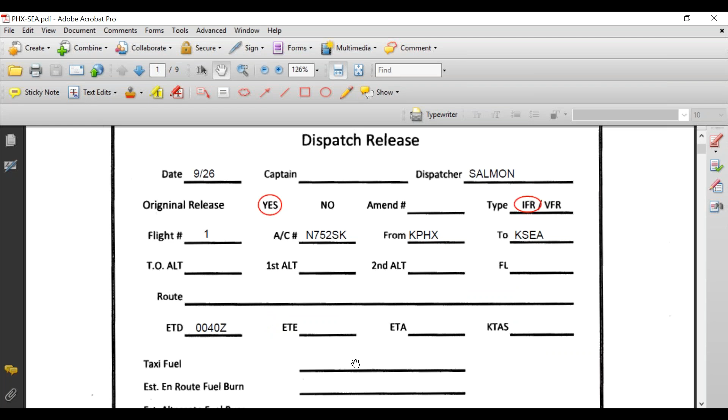Okay, so this is the Phoenix Seattle flight plan that we started. We started filling out some of this information, so let's just go figure out where we're at here. Okay, so we've got the route all in there. We did that initial fuel. So yeah, all this stuff is still blank.

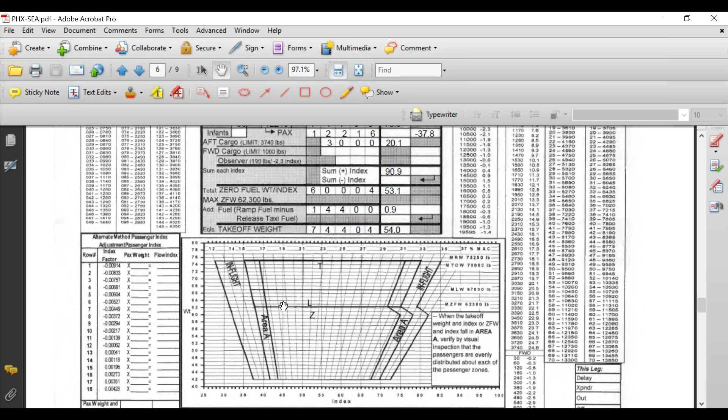We picked all of our runways for takeoff, landing, the instrument approaches, filled in all of the minimums and everything already. We did the weight and balance. Everything looked good there. We've got it all plotted on here. So, okay, so we should be good.

So we estimated on this flight, our initial fuel estimate came up as 14,400 pounds of fuel. That was via using that 4,000 pounds first hour, 3,000 pounds second hour estimation that you guys have been doing all week. Okay, so now we're going to introduce the next little part of this, which is called the simplified fuel estimate. So let me bring up the charts for that real quick.

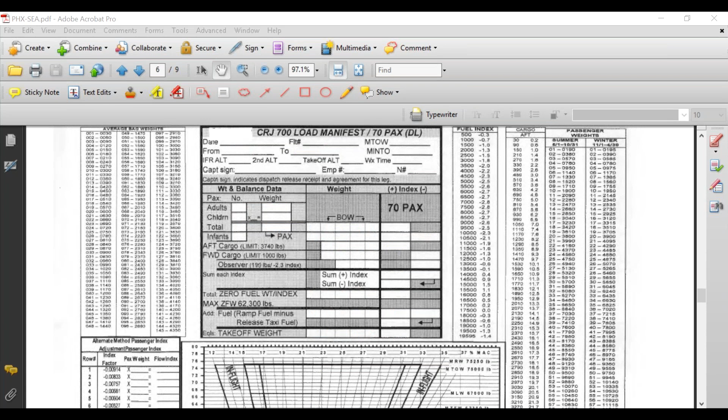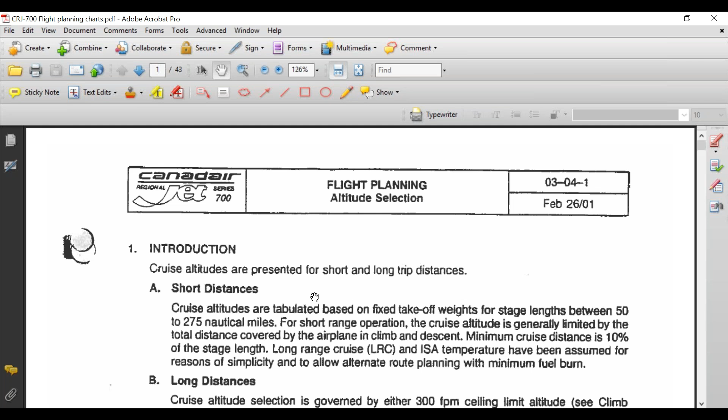So now we're going to start taking a look at some of the different charts we use for the CRJ 700 flight planning. I'm going to drag these over into here. Okay, so this is a little packet of the primary charts that we end up using. I'm going to walk you through kind of how we start using some of these things. So obviously you're going to have to reference back to this video. And obviously this is all recording here.

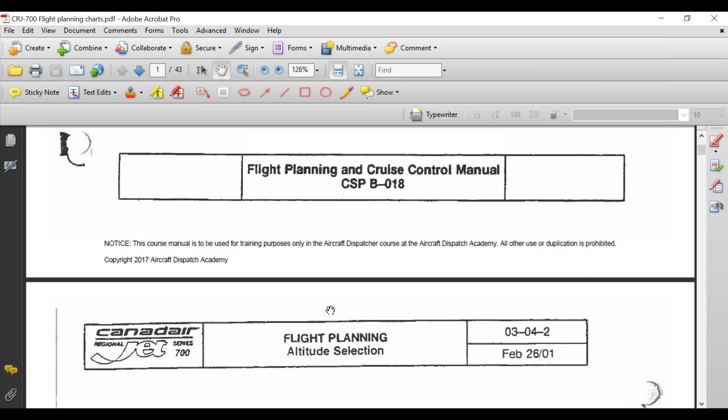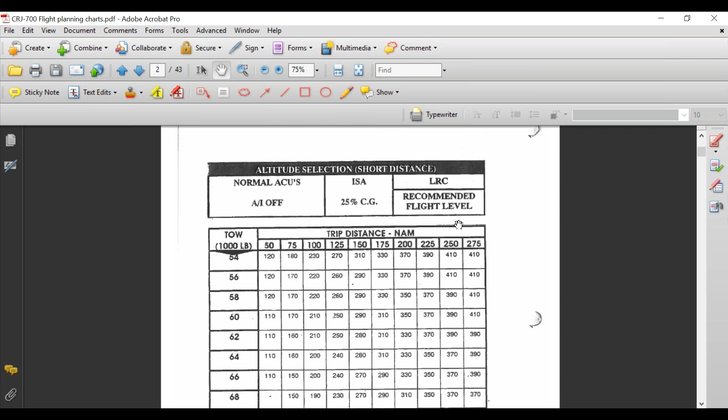So we're looking first for what's called the simplified flight planning charts, okay? And they're just a few pages in from the beginning here. The first couple of pages are all altitude selection charts on how we select our altitude. Actually, let me go back because we do need to figure out our altitude at the very beginning here. Okay, so we'll just actually start with the beginning. So that's altitude selection, short distance, altitude selection.

Okay, as you would think, obviously in the real world we don't use such a ridiculous estimation in real world aviation. So basically there's 3 different ways that we estimate our fuel. The first one we've already done, that's the initial fuel estimation. And the only reason we even do that one is just to get us a rough idea of what our fuel will be. And if anything, it's kind of an overestimation, okay?

So if anything, it's going to put us a little on the heavier side, more fuel than we actually really need. And then we do this next one, which is called the simplified fuel. That's going to refine it down a little bit better for us and give us a little bit more of an accurate depiction. This one is going to take into account the temperatures that we're going to be taking off in, landing in, and flying through, and then also the winds along our entire route. Okay?

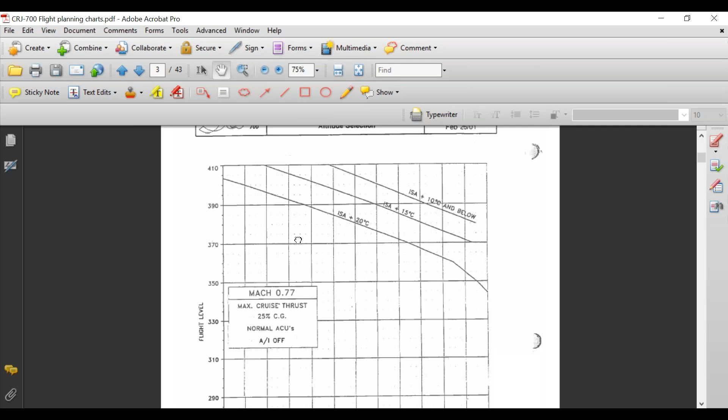So the first thing we need to do, we're going to talk about this little thing here. As you can see these little lines up here, you see this term in here. It says ISA plus 20 degrees, ISA plus 15 degrees, ISA plus 10 degrees. So has anyone ever heard the term ISA yet? In here, right?

So if you go all the way back to like quiz 1, 2, somewhere in there, we talked about ISA. However, I don't necessarily expect you to recall it because it was weeks ago now and there's been a plethora of information since then. But you're going to start seeing, and you probably already have seen, we're going to start taking stuff that we've learned and bringing it back in and putting it into practical use, showing you why we learned it and where we're applying it.

So ISA is the International Standard Atmosphere. What it means is it basically says to us that at sea level, the temperature should be 15 degrees Celsius. This is more of an overall general idea. I don't know how they came up with this temperature, but it's what we use ultimately to figure out how we do performance and what charts we look at. Everything in aviation, temperature-wise, is based on ISA, okay?

So what we do with this ISA figure is we take wherever we are at and we have to compare it against ISA. That's what we ultimately do. So I'm going to pull the weather packet back up that we are using for the Phoenix Seattle flight that we're doing here. Where to put it. In here, and just grab it because we wrote down the information in here.

Okay, so we're going to take a look at Phoenix first. We wrote down the weather that we can expect at departure in Phoenix right here, right? So this is our temperature. This is basically the current weather in Phoenix. It shows that it is 31 degrees Celsius, okay?

So ultimately we are taking this temperature, this is our origin, and what I like to do during this part is break down the route, because we start gathering different temperatures in this phase to come up with some averages for our flight so that we can use it on our charts. So the first thing we look at is Phoenix, and we see that it is 31 degrees Celsius.

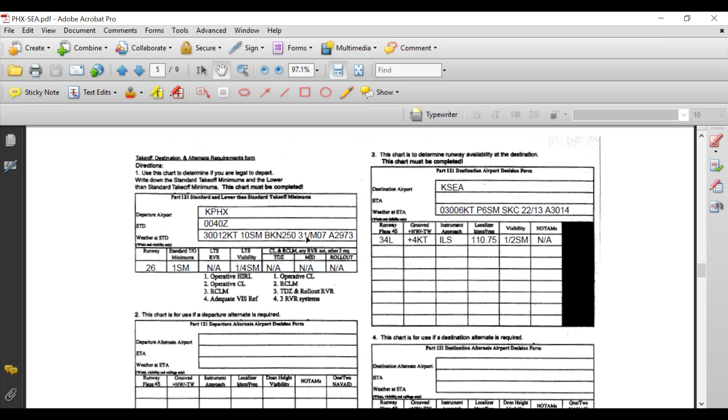We know that ISA is 15 degrees Celsius at sea level, and now we're looking at what we are. We're starting this flight in Phoenix on the ground, and on the ground in Phoenix, we are sitting at 31 degrees Celsius at 1,134 feet above sea level. So now we have to figure out the difference between our real world condition and what ISA assumes that we always are supposed to be, right?

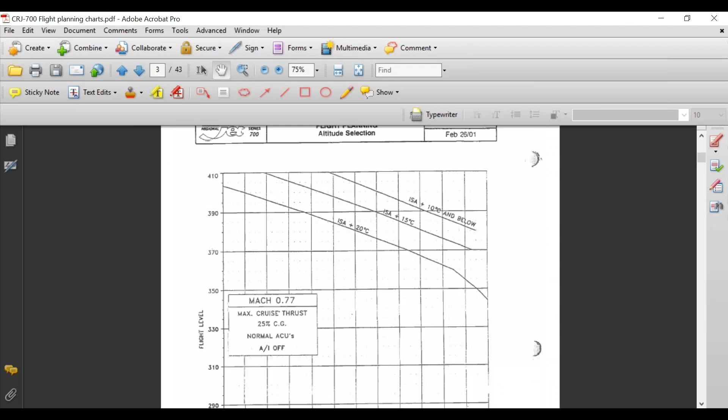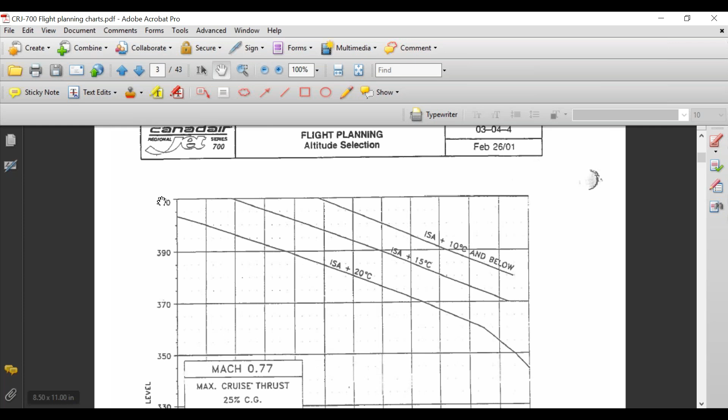I'm going to come back over here. So this chart we're looking at, they look confusing at the beginning, but ultimately the charts are pretty easy to use. Let's zoom back in on this one. So you can see these little lines right here: ISA plus 20, ISA plus 15, ISA plus 10 degrees Celsius and below. These numbers on the left are our altitude. Flight level 410, so 41,000 feet, 39,000, 37,000.

So what this chart is helping us figure out is what our aircraft is going to be capable of climbing to. There are 2 things that we need to know for this chart. We need to know our takeoff weight, which we already know, since we've done our weight and balance. And then we need to know what our origin temperature is.

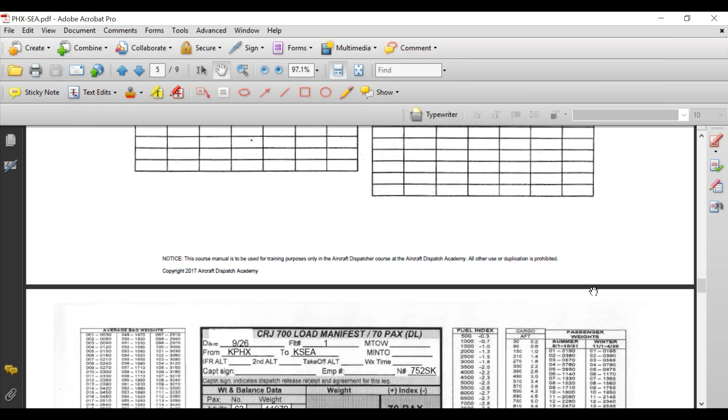Okay, so let's cruise back over here really quick and go back to our weight and balance. Our takeoff weight: 74,404 pounds.

And then we already know that ISA number. We're at ISA plus 20. This is going to tell us how high this plane is going to be able to climb up to. So we're figuring out what our cruising altitude is going to be for this flight.

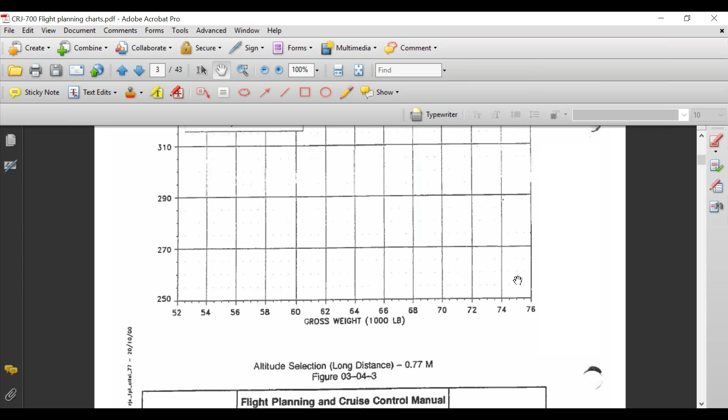So we're clear up here, 74,400. That's basically 74,500. We're going to round it up to the nearest 100, but going up always. So we're going to be right over there. I'm going to put in a line.

And then we're also on this ISA plus 20 line. So we have to draw a line here that meets up from here, wherever it meets into this line, and that's going to be our altitude capability for this flight, the max we'll be able to climb. When it's hot, it's always harder to reach the higher altitudes.

So I'm going to draw a line from basically the middle here, just go straight up. Just wherever it meets this line, basically right there, that's going to tell us. Lucky for us, it hits it basically right at 35,000 feet.

So the next consideration for this, we know that we cannot climb any higher than 35,000 feet for this flight. The next consideration for us is, what direction are we flying? We're going Phoenix to Seattle, but overall, when I say direction, what I ultimately mean here is we're looking at which flight level we're going to file, as far as, if you're going east, we do odd levels. If you're going west, we do even levels.

So you have to base this off of, even though most of this flight is like northwest, technically that's going to be your real direction. But if your origin, in a situation where you're going straight, and I'm doing it the way I'm looking, but if you're going this direction, Phoenix to Seattle, northwest, if your destination, you just need to figure out, is my destination west or east of where I took off from? It's wherever you end up. That's kind of how you base what you're going to file, as far as, okay, this flight overall is a western heading flight or an eastern heading flight.

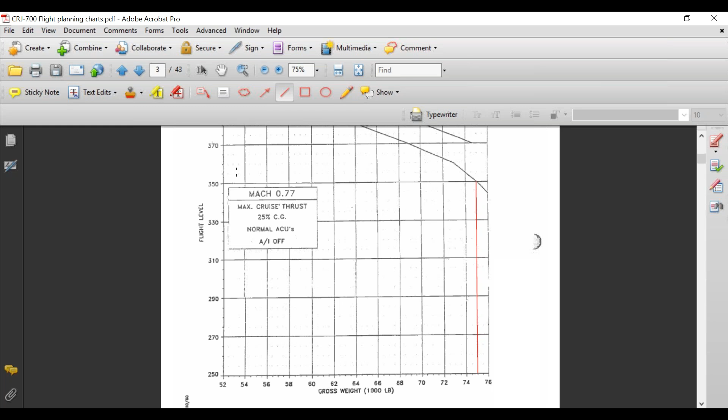It's called NEODD SWEVEN. Has anyone ever heard that? It technically means north and east is odd, and south and west is even. So anyway, NEODD SWEVEN, in case you want to remember that. But really, the best way is just to say, well, is my destination west or east? Because you might be on a flight plan that circles over here, and then if you go around weather, then you're going east for a while. But wherever you end up landing, is it east or west of where you took off from? That's really how you're going to base this, the best way ultimately to look at this.

So Seattle is obviously west of Phoenix, so we're going to file it at an even level, which means this right here, the cap on our altitude is 35,000 feet, which means that we have to take this down to 34,000 feet in order to comply. So you don't go in between. You always go to an even, to the nearest 1,000, and then you adjust it from there. So we're going to end up filing this flight at 34,000 feet, even though our capability is 35.

The problem is, in order to get higher than 35 or to go up, we'd have to have the capability of hitting 36 in order to go any higher than 34. That's the problem, because if you're going west, you've got to stay on an even level, and you can't go to 35 because that's for people going east only. So that's how they do a lot of the separation of traffic. They're always at odd and even altitude levels.

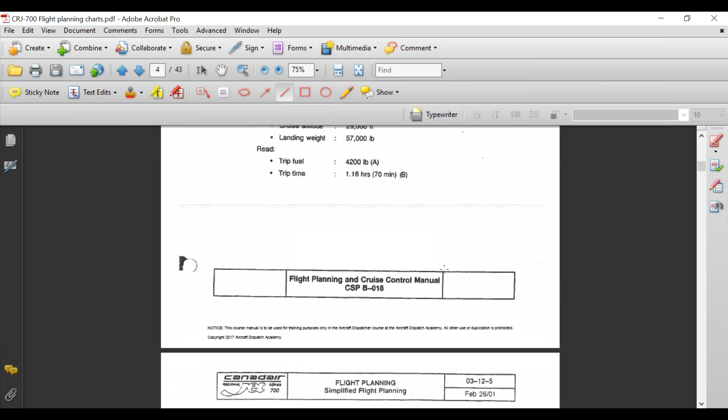Okay, the next part that we are going to figure out, I need to input the flight plan back into SkyVector. Somebody want to read it off to me because it cleared it out when we were doing the last class. Yeah, I took notes, but I didn't write down any of this flight, so I'm sorry. You got it on your... I've got it on my thing over here.

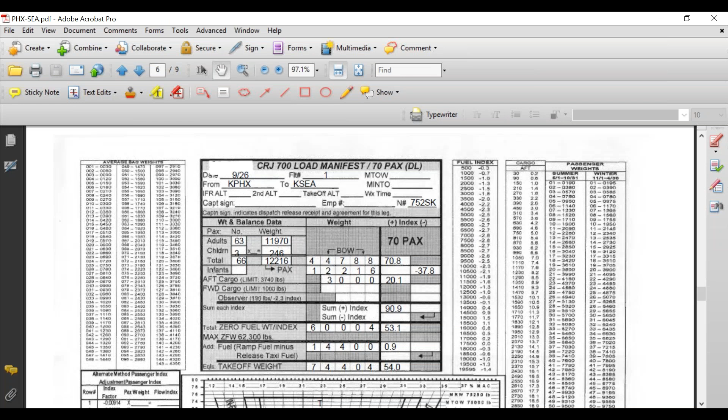All right, I got ZEPER, CHILY4, BTY, J92, Klamath, J189, Battleground, OLM.

Okay, can you do it one more time? Yep, Zephyr. Z-E-P-H, P-E-R. Or, maybe I spelled it wrong. That could be it.

ZEPER to CHILY4, was it like that? That's what I have written down. Okay, because that was an intersection, and then to CHILY4. This is the one that we had to put in each individual one, right? Yeah, okay. So this is going to be a little bit tougher here.

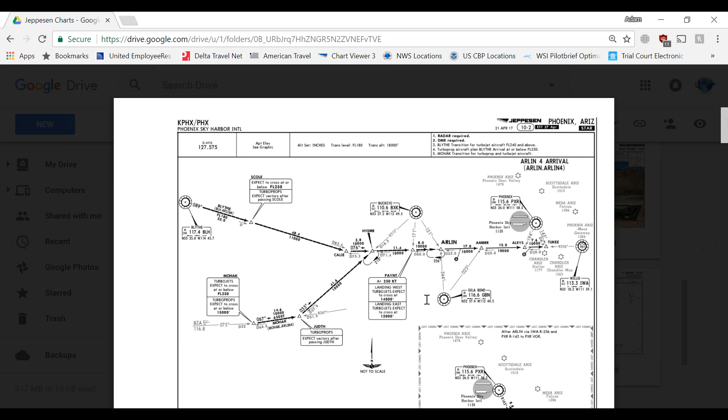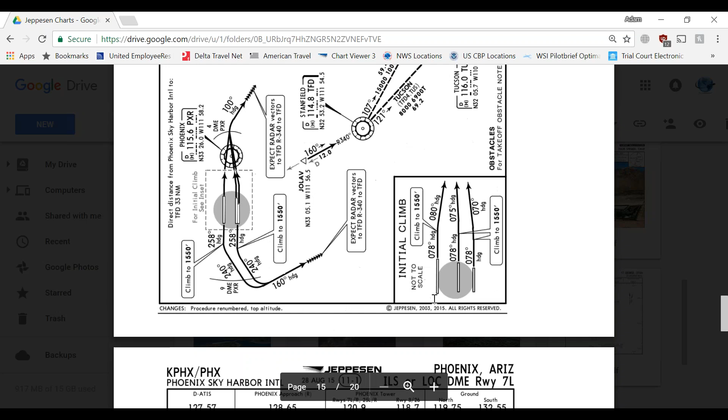Hold on one second, I'm going to bring up our actual charts here.

Oh, right there. Okay, so ZEPER, KARLO, CHILY, RAMSY, SSEEK, DOVES, BEATTY. Okay. We didn't have to put KARLO, did we? You have to list everyone that's on there.

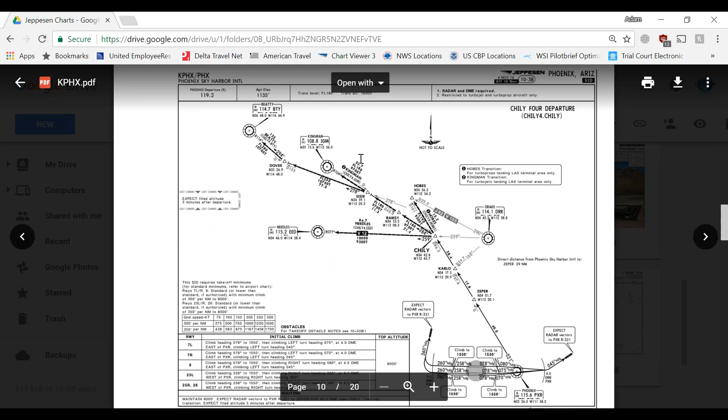The problem with the SID is that if you're looking at it like this, I know it looks like, let's see, where was KARLO? Like right here. It looks like it just goes straight through it because you're going to CHILY. But a lot of times, in most cases, it really wouldn't make a difference. But there are several SIDs or stars out there where if you're having to do it this way and you don't put in every point, you're going to get one that isn't right on the route, where it ends up being a different distance.

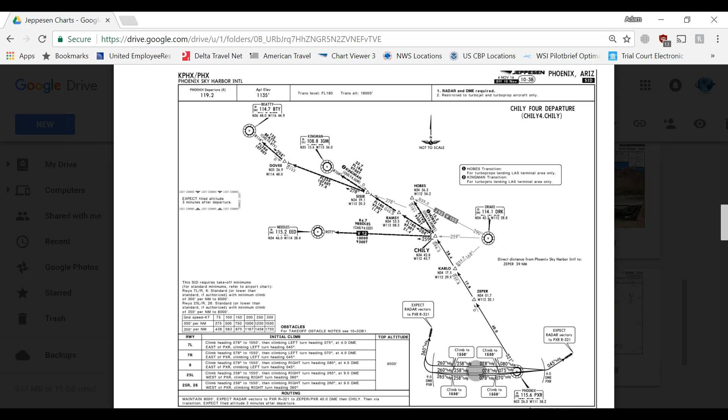So we only had to do this because SkyVector wouldn't take the SID. Okay, that is the only reason. Yep. As far as the way we wrote it out on the plan, we don't even write it like this.

What does ALS stand for? Approach lighting system.

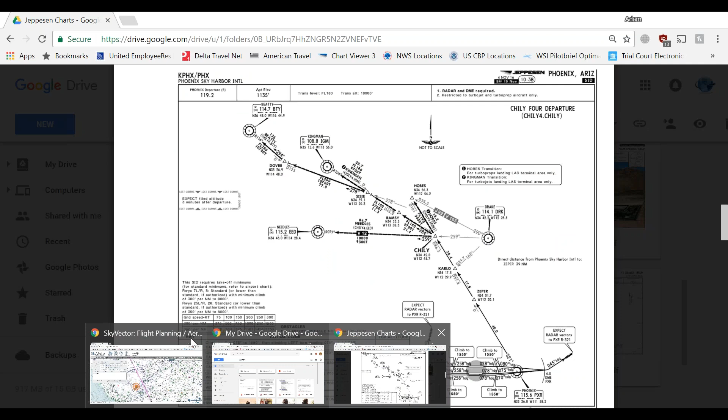Hello, CHILY. And it was RAMSY, SSEEK, DOVES, BEATTY. Okay, then from that point, what, J94?

92 to Klamath to Battleground. Where's he? No, Klamath, J189. Then J189 to Battleground, and then OLM too. Yep. Okay.

All right, okay, so that puts the route back in there. So going back to where we just left off a second ago, for some reason that's not following that. So hold on one second.

What's that? Okay. J92. Okay, so that should put the route back in there.

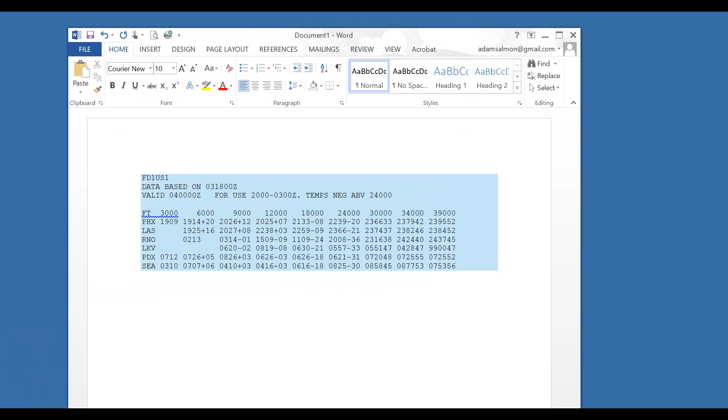It is a lot easier using SkyVector. Not a lot, but anything on the computer is easier, that's the bottom line. It's funny because you guys use SkyVector at work, don't you? No, we don't, but kind of. It's not an official source, so you can't officially use it, even though I know it's accurate. When you get into dispatch, everything you use for planning has to be approved by the FAA, and SkyVector isn't FAA approved. There's a program that is, but I don't want to use that one. You mean like when we take the practical, you'd think they'd let us use the program you guys use at work? No, because there's no way to access it - you'd have to subscribe to and get a license for WSI Fusion and all the other stuff they use.

So going back to the winds aloft - we need to average all of these winds aloft along this portion of the route. We'll take all of these and get an average for the entire route, and put our findings down here. First, let's average our wind direction. If somebody wants to jot down these numbers, we want to add up 230, 230, 240, 40, 70, and 80, then divide by 6. That gives us 148.3, so 148 if we take off the decimal.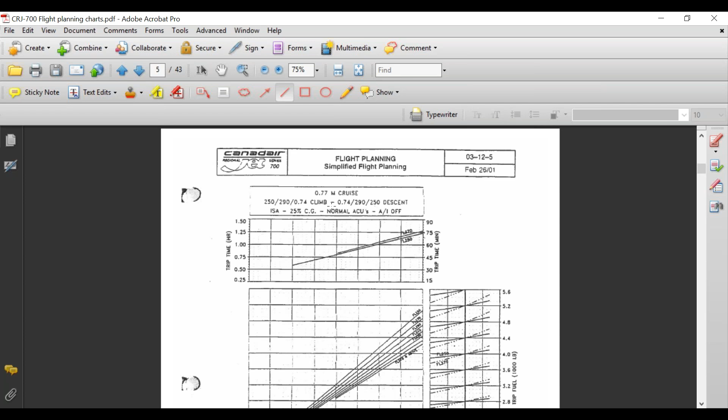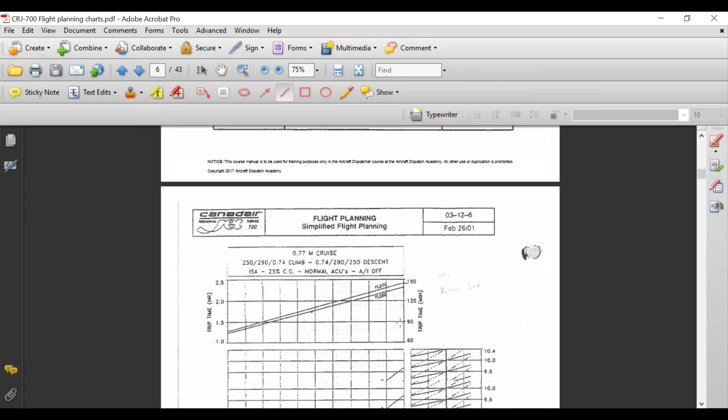When you look through these charts, you'll all have a copy of them, but there's a couple different versions in here. The big difference between them is the overall distance of the flight. This one is for 100 to 500 mile flights. If we keep scrolling down, the next one is for 500 to 1,000 miles. So this one we're doing is 1,048.

So we're actually going to be down on the next one, which is basically from 1,000 up to 2,200 mile flights. We're going to be on the very edge of this one because we're just barely over 1,000. So that's the first thing we start with - whatever chart we're looking at is ultimately based on the total distance of our flight. So that's the first thing you want to look at, total distance, 1,048.

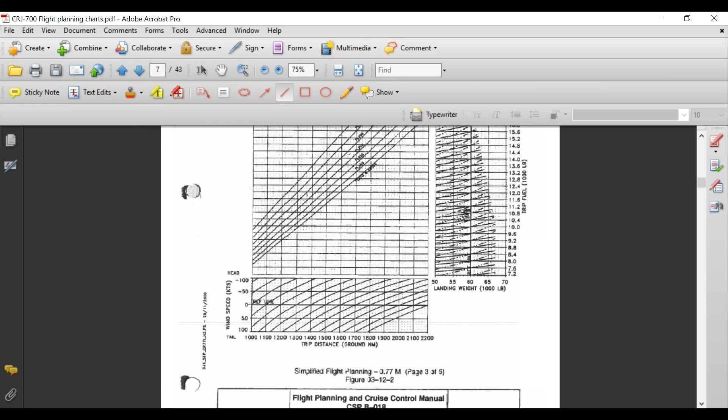So we come in here. These charts, to basically start making sense of them, all have different little portions to them, but on these simplified charts, we start down here on the bottom left-hand corner. And there's this thing right here that says ref line. That stands for the reference line, and that's basically where we start our calculation from.

So all flights, every time we do this, you'll always start out right down here. Whatever your distance is, that's the first thing you go to, but you start out on this reference line. So if our trip was 1,200 miles, we would start out right here, but on this 0 reference line, or if it's 1,700 miles, we'd be over here. But it's always going to be somewhere along this 0 reference line, and just depending on what our distance is, we just match it up.

So we basically are 1,050 miles. So since this is 1,000 and this is 1,100, we're basically starting right here in the middle. I'm going to zoom in on this. Sometimes the easiest thing to do is just put a line in here, or if you wanted to do one with a ruler, you can do that. But we're right here on the reference line, and that's just marking kind of up and down where that point is.

So with a tailwind, we actually would be going the opposite way, following those lines the same direction but going this way. So we would be essentially going down until we get to 50. So this is kind of a tough one because you start here and you actually have to go back into the previous chart in order to get to it, because technically we're kind of out in this range, right out in here, and then we're essentially drawing a line back to where we get to 50.

What? I'm sorry, you lost me there. I have no idea what you're talking about. The other chart. Yeah. Oh, it didn't have it past the 50? Well, you can see this one, the problem with this one is that this one starts at 1,000. Okay. Okay, so I was like, what? Yeah, I know it's confusing because of those two. So

That's why I showed you the example of this one, because if we have the 100 knot headwind, then it just stays on this chart and it goes up here. If it's a 50 knot tailwind, we go backwards the other way. But the problem is as soon as you get below 1,000 here, going this way, then it's technically back on to this chart.

Because ultimately, if you think about it this way, a headwind is not increasing the distance of the flight, but it is increasing it from a fuel sense, right? You have to burn more fuel to maintain the speed because you have 50 knots of wind working against you on a headwind. On a tailwind, it's actually helping you. So if you're flying 400 and you got a 50 knot tailwind, your plane's really going 450, even though the plane thinks it's only going 400.

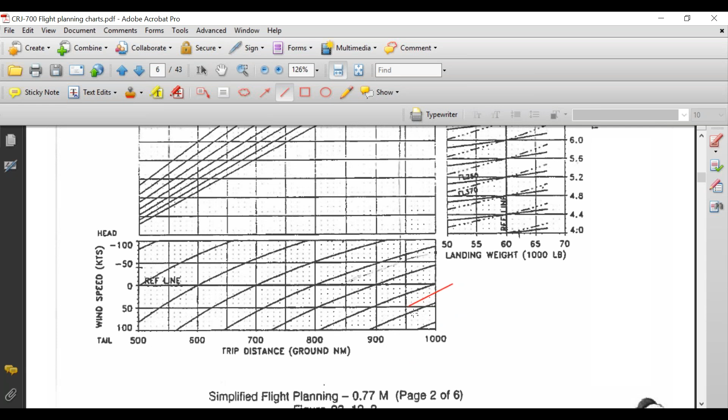So on this chart, and I know it's more confusing because it brings us back into the previous chart because of the distance factor, after we've compensated for our tailwind, it's now bringing us back to right here. So this is the next starting point, or the next reference line, and from here we're going to go straight up.

There's a lot of these on my ADX too. There is? Okay.

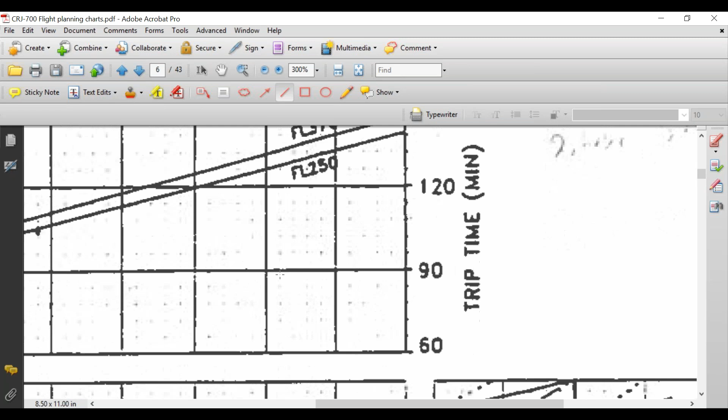We're going to go straight up to the altitude that we're flying at. So this first line right here says flight level 370 and above. So if we're 370 or above, we just go to this line. The next one, and I can zoom in so we can read these better, says 350, 330, 310. So if we're at 340, it's going to be halfway in between 330 and 350.

But we need to draw our line up from this point here at the bottom where we ended up. Like I said, I'm just eyeballing most of this, but I'm just going to draw in a line right there that connects. So we go from here up to the altitude that we're flying at, which is 340, we already figured out. And on this scale, it's between the 330 and the 350.

So from here, we go straight over. If you see here, there's another reference line. So we draw a line from this point straight over to here. I'll just connect them like that. I need to bring that one down a little bit. Oops.

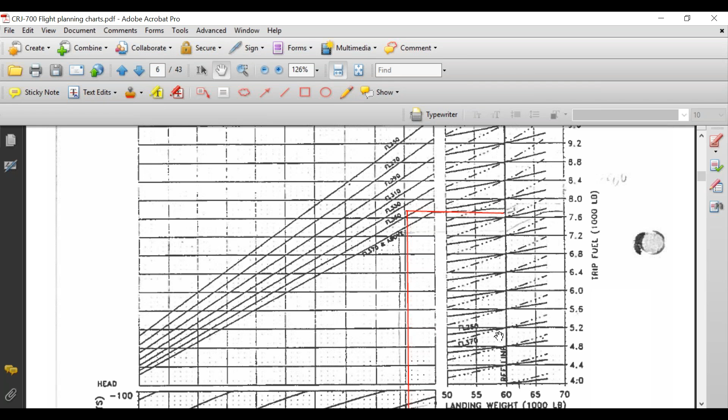Going back to our weight and balance. So, 504. What's that? 62,504. Okay, so 62,504.

So if you come down here along the bottom, we've got 50,000, 55, 60,000, 65. So if we're landing at 62,504, there's 61 right there, 62 right there. So we're going to be halfway in between those. I'm going to bring back my little line tool. So we start here on the reference line.

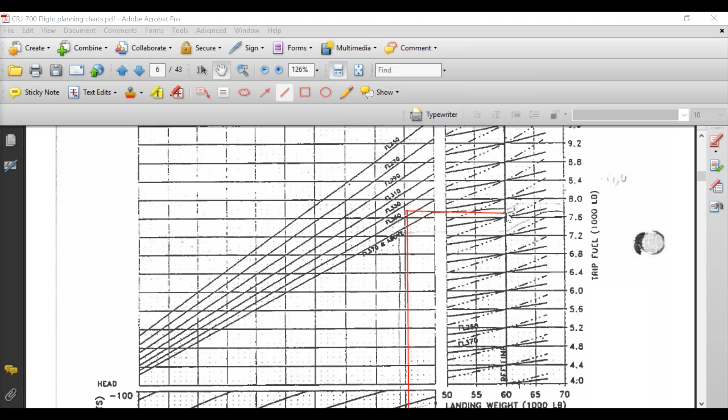Even if you wanted to draw like a line up from the bottom, just to make it accurate for yourself, you can. But what we do from here is, if we're landing below 60,000 pounds, then we follow the contour of this line backwards. If we're landing above 60,000 pounds, then we follow it to the right, going up. So we're landing at 62,500. Once again, I'm just eyeballing and guesstimating it here, but I'm going to draw it more or less into that spot, and I follow this line that has the dots.

And then from there, if you go straight over to the right, that's what your simplified fuel burn is for the entire flight. These have to be times by 1,000, but 7.6 would be 7,600 pounds, 8.0 would be 8,000 pounds of fuel. So we want to draw this line over, just to signify where we're at. But 7.6, that's 8, so we're pretty much 7.9, more or less.

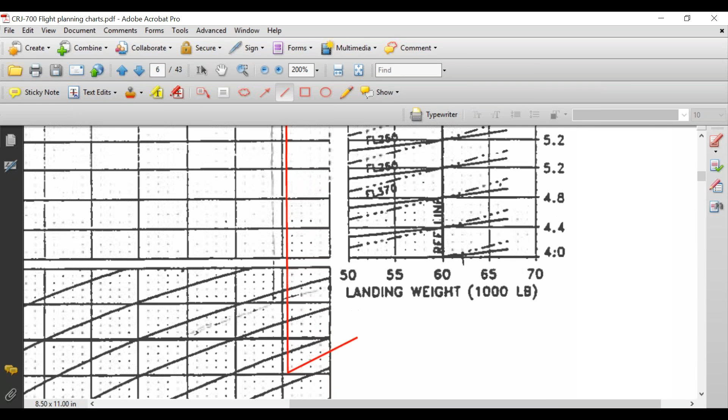Well, so you just always automatically bring it to that center line from... Yeah, that's the reference line. So, okay, if you see this, it's kind of like the headwind, tailwind, it has that reference line. From this point, when you get to here, you've got to come straight over to the reference line and then adjust for the landing weight.

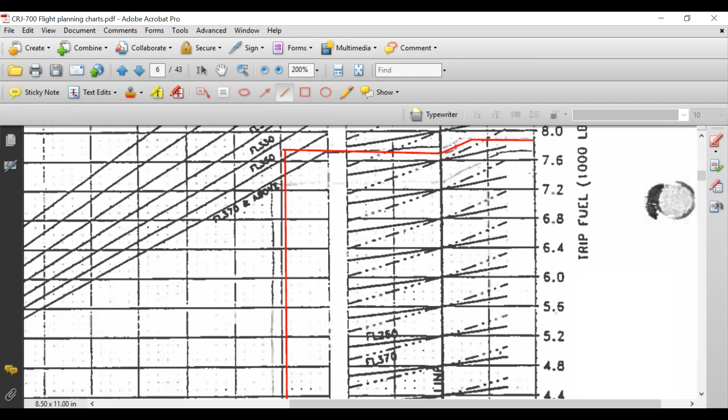Either down to the left or up to the right. And then wherever you end on this, like if it was down to the left, then you would end like here, and then you'd go straight over from there, and that's your fuel. In this case, we went up to the right, to there, and then straight over. That's our total burn for the flight.

So not to be confused with the total fuel. This doesn't include the reserve fuel, doesn't include alternates, doesn't include hold fuel, contingency fuel. This is just simply the burn from Phoenix to Seattle. So does anybody remember what we figured out was our burn, using the 4,000, 3,000 method?

Just to compare these two numbers with each other. So it would be 14,400 minus... I think it was 11,900. Okay, so pretty big difference, right? We figured 11,900 pounds. That was based on flying, based on that 4,000, 3,000. So this is a pretty big difference. So we are at 11.9 and we're at 7.9.

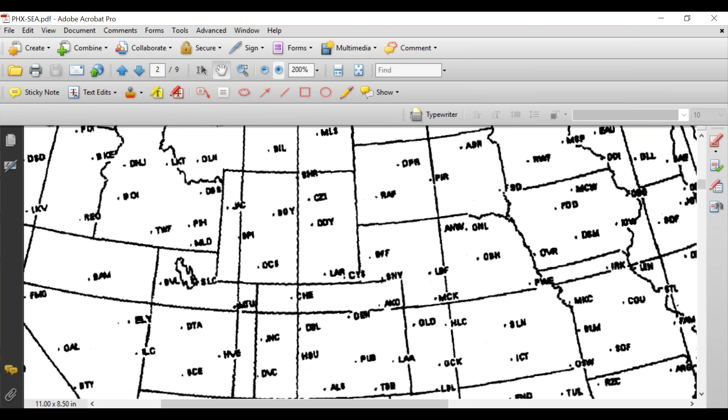So I'm going to bring the flight plan packet back up. All of these numbers that we just planned and talked about, they all go in this section right here, Simplified Flight Planning.

Now we're going to actually put what we really came up with in this box here. So in this one we're going to put 7,900. This isn't necessarily stating the fuel that we're going to use - 7,900 though is what we would plan. We don't have an alternate, so that's 0. We didn't plan any contingency fuel.

Then this is going to equal our takeoff fuel, so whatever 79 plus 2,500 is - 10,400. That's going to be our takeoff fuel. And then 10,650 is going to be our ramp fuel.

Now when you're looking at this ramp fuel and takeoff fuel number, the only thing dispatchers care about is the takeoff fuel number, okay? The takeoff fuel number represents the flight as it takes the runway and gets ready to take off. Those are the numbers we care about. We don't care about the fuel the plane burns pushing back from the gate and taxiing out to the runway, because that's not in the air. So in this class we always just plan 250 pounds of taxi fuel. But for our purposes, like the weight and balance example here, the weight and balance doesn't care about the taxi fuel - it only cares about what the fuel is as the plane is rolling down the runway, because that's where the real weight is. Any fuel burned prior to taking the runway doesn't matter because it's not on the plane anymore. So don't confuse this ramp fuel number with the takeoff fuel number - the takeoff fuel is the one that's important to us.

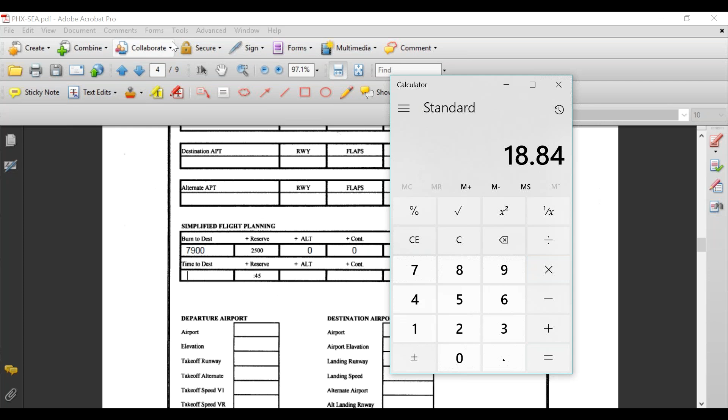So you can just write 2 hours, 19, or even go 2H19M if you want. Then 2 hours, 19 minutes plus the 45 - we didn't have any alternate or contingency - ends up being 3 hours and 4 minutes, 3H04M. So that's all you do there. It should be pretty simple.

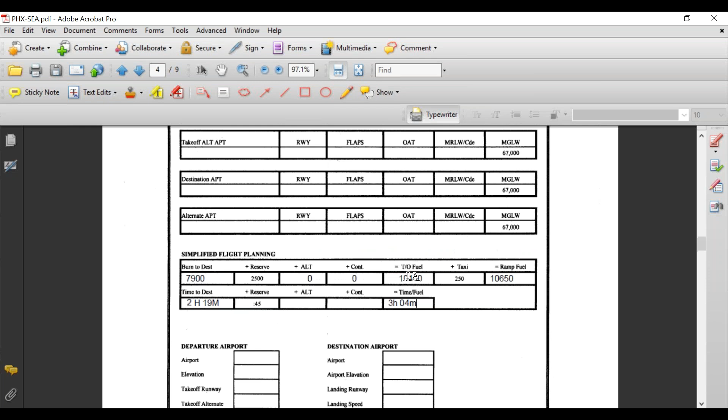Let's do it. Yeah, real quick, so like all four of mine on the dispatch release, I was filling out, like putting in what SkyVector was giving us. So basically we'd probably go through and get the actual, same with the fuel, like the 14,400, we'll have to redo that.

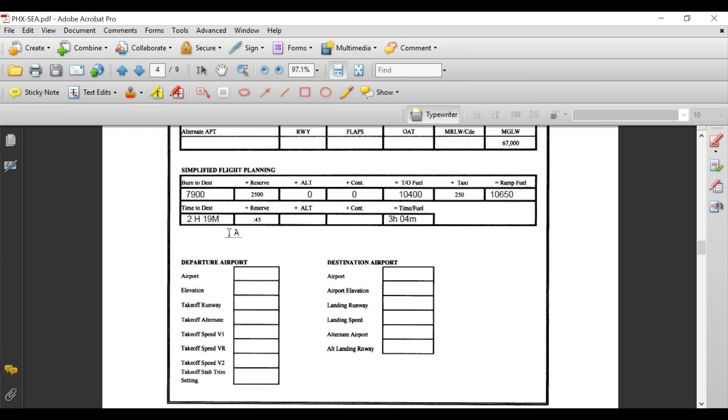No, well, see, that's the thing - if you're talking about your front page, you shouldn't be filling out any of that on the front page yet. Remember the front page is reserved, none of this gets filled out until you're done with your flight plan, all the way done. So none of this, all of those fuel estimates, this ends up being your final fuel that we do at the very, very end, that we come up with.

What's that? The route? So yeah, none of this would get filled out yet. Most of this we fill out once we're done completely. This is the last thing we usually fill out at the very end.

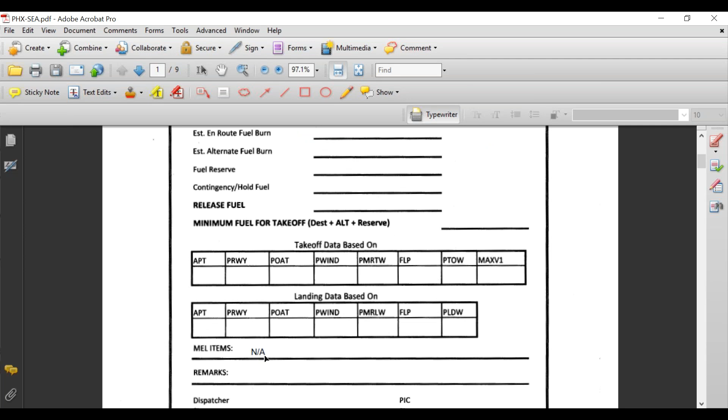Other than MELs, you can put, if things aren't going to change, MELs not applicable. The only other things that are for sure are the date, the aircraft number, the city pair, the IFR, the simple stuff we put in, flight number 1, that stuff, yes. The only other thing we've added here is 340 for 34,000 feet. But anything else, even ETE, ETA, all this stuff is still not known perfectly for sure until we get done doing the final part.

What about the route? Can we throw that in there? Yeah, the route you could put in now at this point. But anything fuel related won't be figured out till the end. Yeah, for like runway and stuff like that. Yeah, if we've got this stuff, you can plug that in.

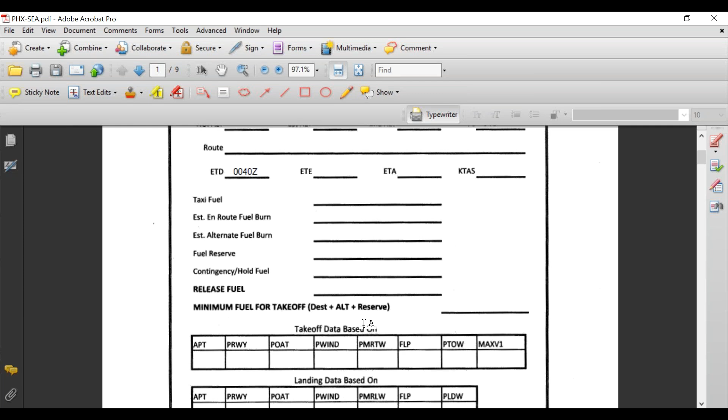But the easiest thing though is to just leave the front page alone until you're done. Honestly, there's no point really even in plugging in onesies and twosies worth of stuff when you can just do it at the very end. I just like to leave it all for the very end just to make sure everything's correct, because there's usually spots for everything else in the rest of the form here.

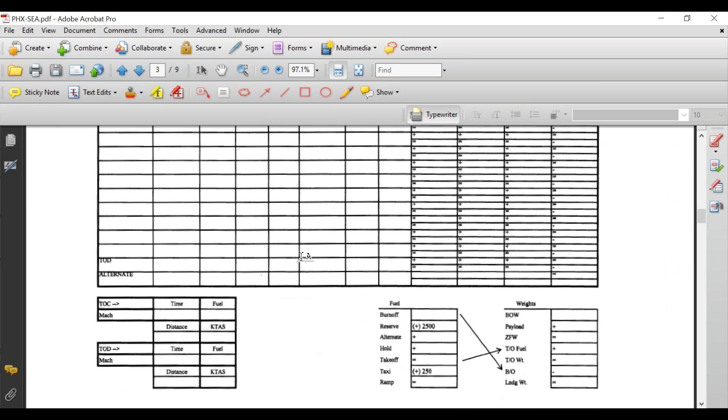Put our break at the end. We're at least going to run through another one.

I want to take at least one more of the ones you guys had from last week and run through doing the simplified portion. It takes a lot longer running through it the first time. The more we start running through it, the quicker you'll see how you can hurry and get the information and plug it in.

Does anybody want to give me the information from one of their other flights? Is this where we're stopping on this one then? Is that what you're saying? Today's objective is to get through the Simplified.

Okay, the rest of most of this week is really going to be you taking the flight plans you've already done and getting them now to this point.

Well, are we not going to go over any that have like MELs and alternates and stuff like that? No, we'll start adding once we get complete. Once we get these ones all the way finished, then you're going to start doing ones just from scratch with MELs, weather, because we already have...

I mean, these ones are already assigned the weather, the MELs, and everything else. So yeah, we'll be adding those in. But I want to make sure you guys have all the steps in before we start throwing MELs and stuff like that into it.

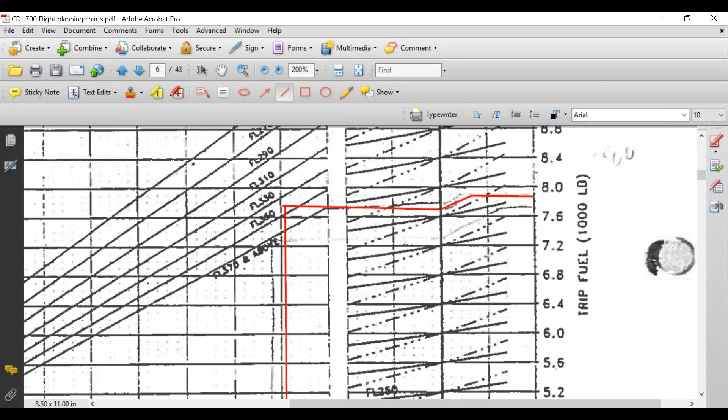Okay, but everyone else in the 71 range? Okay, that works then. So what we're going to do is we're going to go back up to our trusty altitude capability chart.

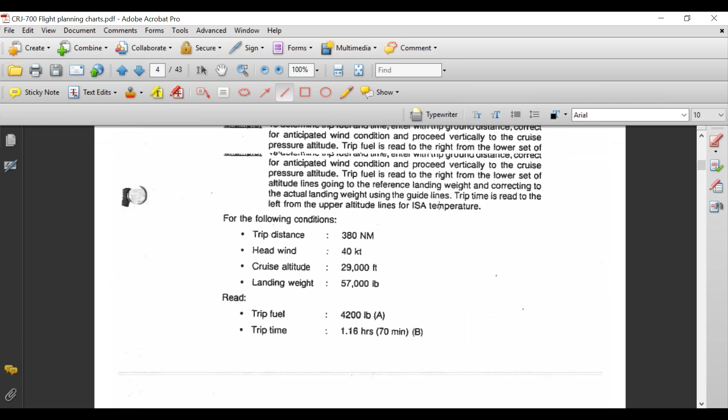Right here. Okay, I'm gonna get rid of that one.

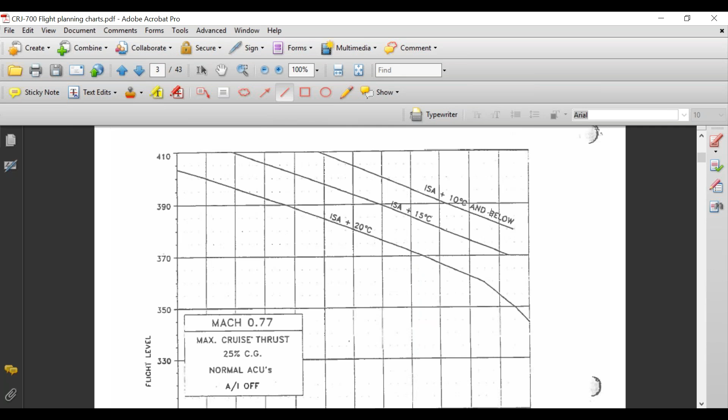So it's 71,013, closest to 71. Since we always go a little bit heavier, we'll round to 71.5 right there. And then we're at ISA plus 10 and below, so we technically are going to go up to that line, and we're following from this line.

I'm going to back out a little bit here, and go from there straight up to there.

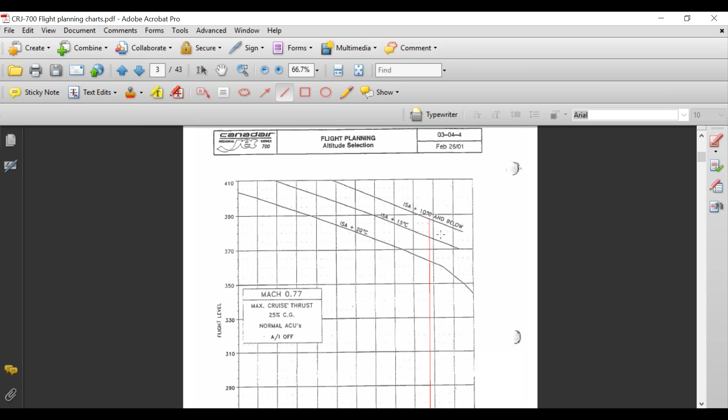Okay, now if we're on that line, now we can figure out right here where we're at. So right here, we just go straight to the left, and we can see that we can almost get to 39,000 feet, but not quite.

So this is Denver to LA, so we've got to be even or odd? Even. So if we are basically capable of getting up to 38,500 feet, that means we would just go down to 38,000. So 38,000 is what we'll plan it at. So now we've got our altitude. Outside of that, there was nothing else restricting us.

We don't have any MELs, so we know we're good for 38,000. Temperature, altitude, we've got 2 of the 3 things we need. Only other thing is going to be the route, or the route and the winds, yeah.

But the route will help you decide which winds we're going to use. So what was your guys' routes? For the information you've been doing it off of so far, the route was Rocky 3, DBL, J60, Hector, down to Daggett, right? Or to Hector. Okay, yeah. Red Table, J60 to Hector, and then the Downey 4.

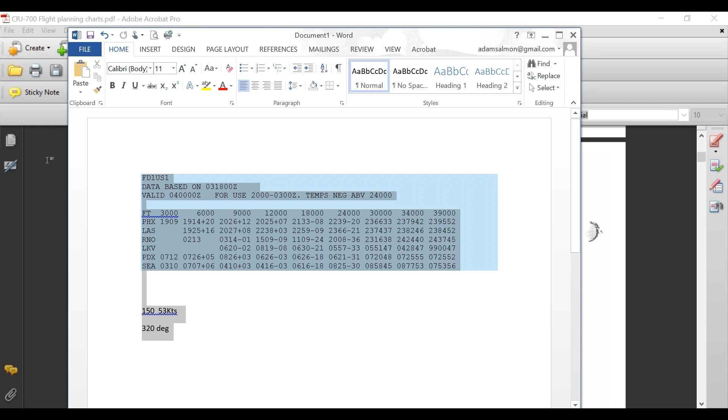Then maybe it was just the reserve fuel or something. Okay, so let me hurry and gather our winds aloft. I'm going to get rid of all this information. I'll just bring this back here for a second and then copy and paste it.

When you planned it out, did you change the speed at all? Did you guys? Mm-hmm. Yeah, that's weird. I think I did 400. Maybe it was crazy to go back.

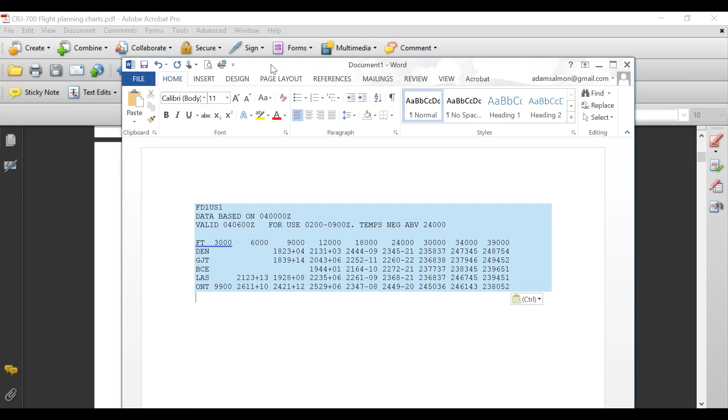Okay, there's our winds aloft. Denver, Grand Junction, Bryce Canyon, Vegas, and Ontario. Those are the ones that are basically closest to along the route.

So we're at 38,000 feet. You can see just below 39, which is going to be the closest one. So the biggest thing here is just comparing the last two. That's 240 and that's 240 on the heading, so that's easy, just keep at 240. 23 and 24.

If somebody wants to be adding these up as we go along, we can just quickly get the average. So 240 is going to be the average on the first one. The next one's going to be an average of 230 and 240, so just do 235. The next one's going to be 230, then 235, then 235, and then divide by 5. 235, I figured they're all pretty much the same. So 235 is going to be our average wind direction.

As far as our wind speed goes, 73 and 87. So it's going up. Difference of 5,000 feet, and that's a difference of 14. So we're going to be more like 85, 80s. We'll just plan 85. So 85 plus 90 plus...

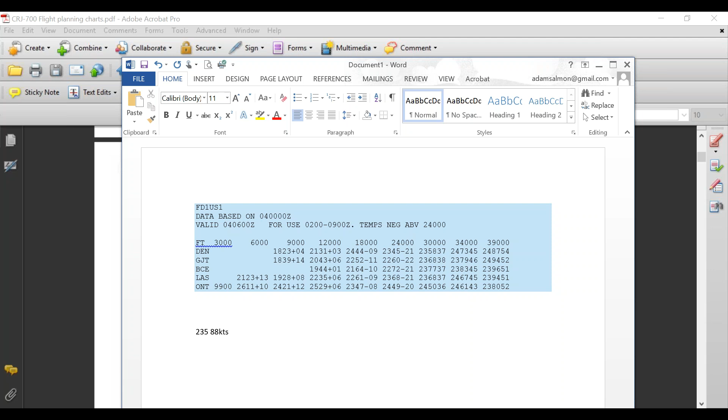Clear that out. Go in. So that's saying average heading of 238. Oh, this is going to work out really nicely. Average heading for the flight is 238. So you can assume, I mean, you probably don't even need to use this in this case. It's so close that it's going to be, yeah, this is going to end up being really an 85, 86, 87 knot headwind straight on, right?

So anytime these numbers match, just remember the rule of the wind since it's opposite. If these numbers match, that means you're flying into the wind. Just like on a runway, if you're picking a runway to land on, you pick the one that matches the wind, right? So 88 knot headwind essentially on this flight. So I'm just going to throw it on here for the sake of throwing it on here.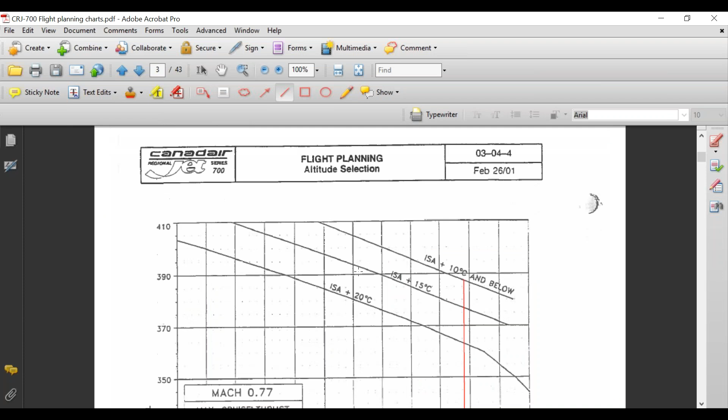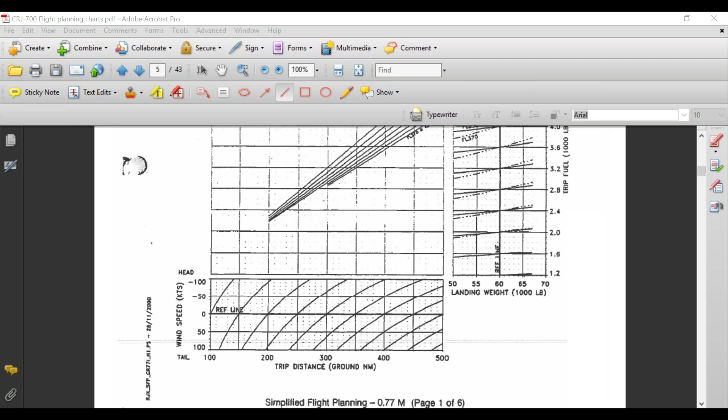What was your guys' total distance on this trip? Let's see. You know what? I don't think I wrote it down. I can hurry and plug it in. I had 757.3. 757.3? Yep.

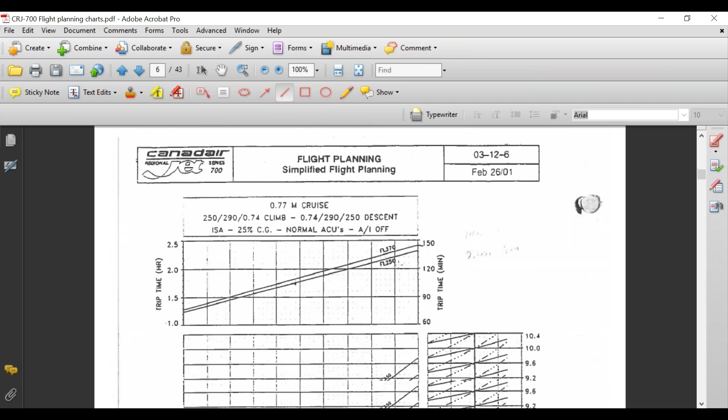Albuquerque. So going back to this chart. So that's the 100 to 500. This is the 500 to 1,000. So that's the one we want. Get rid of that previous line crap we had in there. Delete it all. Okay. So 810.3. So remember, we start on the reference line. Go straight over to where our distance is. So this is 800. So we're 810. So that's 810, 20, 30, 40, 50, 60. So that's 850 there. So these are all 10 miles on each of these dashes here.

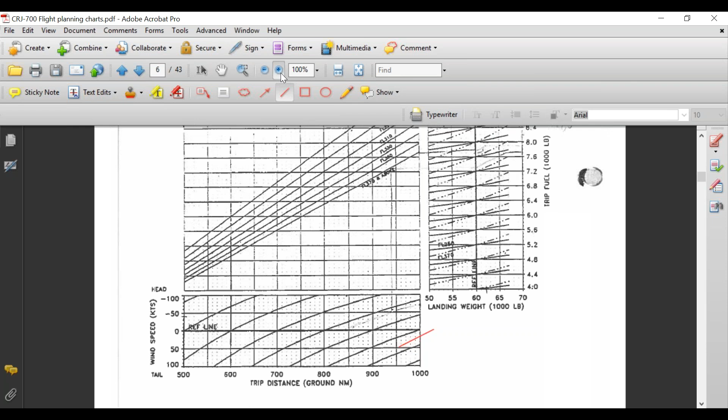So let's zoom in. This is going to be nice because we can keep it all on one chart here. Got to get rid of that one. Okay. So 810, we're right here, and we have an 88 knot headwind. Who knows, it might actually take us into the next chart. So anyway, it's nice because this line is really close. So we're really just following right along the bottom of this line and just tracing it until we hit 88. So we're just barely below it. It's literally right underneath it.

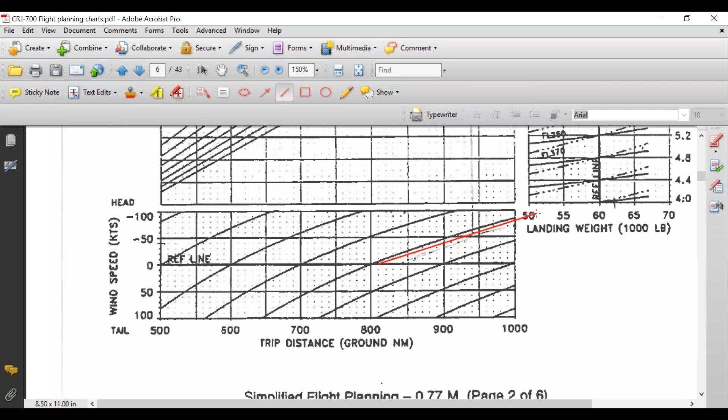So right here we're at 50. Right here we're at 60. Right here we're at 70. Right here we're at 80. So we're going to be like just below 90, which is going to be clear over here. Unfortunately, we do go into the next stupid chart. Get rid of this crap. Okay. So 90, it's right there, so it's like right here. Going to pretend that we just came through the other one. Anyway, so like right there. Perfect. Okay.

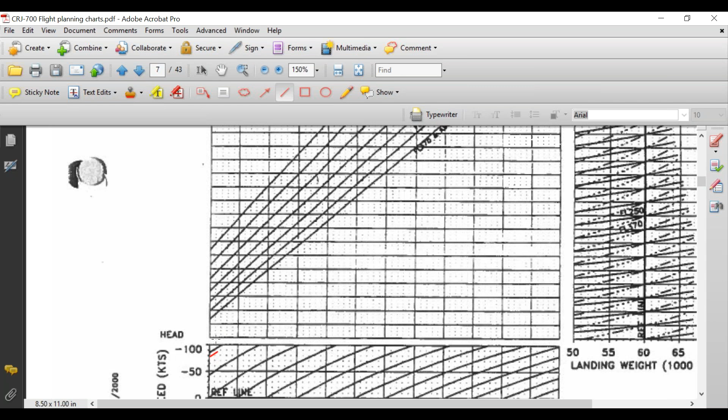So now we are going to take this line straight up, and we are at 370 and above. We're at 38,000 feet, so we're going to go to this line that just says 370 and above. So we are just inside of that line right there. Take it down to right there. Okay, and so that one is going to be just under this line. So I'm going to just trace it from right here.

If you have rulers and stuff to use, it'd be great when you do these manually. But anyway, so I'm taking that line and I'm just going straight over to that reference line. Now I'm here at the reference line, and what was your guys' landing weight? 61,913. So 62, basically. I had 68,513. Oh, 60.

Because what are you guys coming up with for total burn, more or less? 8,950. Because total fuel was 11.6, right? So minus the 2.5. So somewhere in that ballpark. 91 for you. So we're talking anywhere 88, 89, 9,000, somewhere in that ballpark. Okay. So let's just say it's 9,000. So what's 72 minus 9? So basically 62,000 pounds, if we round it up a little bit. So we'll just say 62,000 is our landing weight.